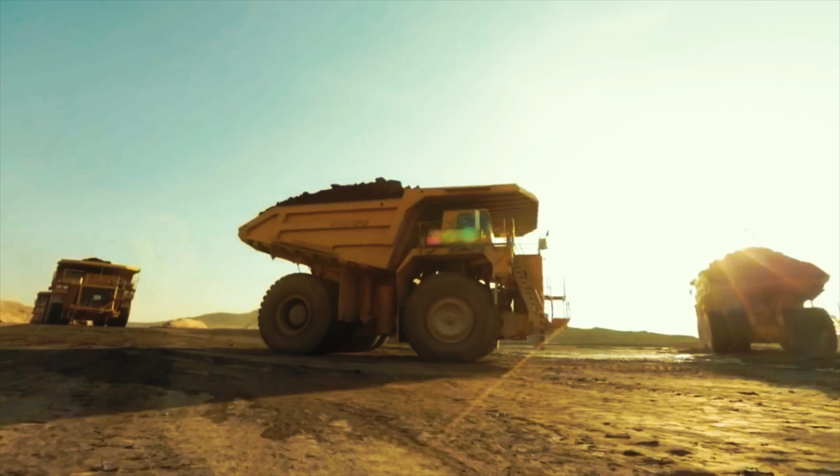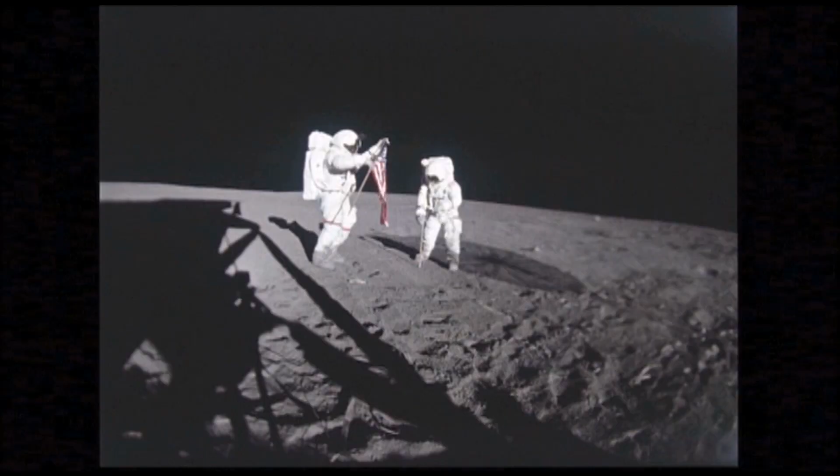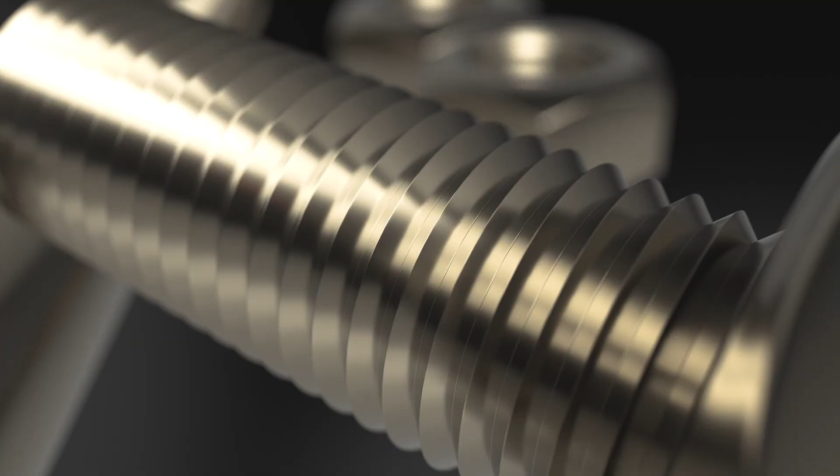From mining to renewable energy, from bridges to tunnels, high-rise buildings to foundations, toys to cars, from hanging a painting to landing on the moon. Bolts, nuts, washers, rods. The family of fasteners are the unsung heroes of the most basic personal contraptions to the most advanced inventions. Critical wherever they are, the finest fasteners once installed never revealed themselves.

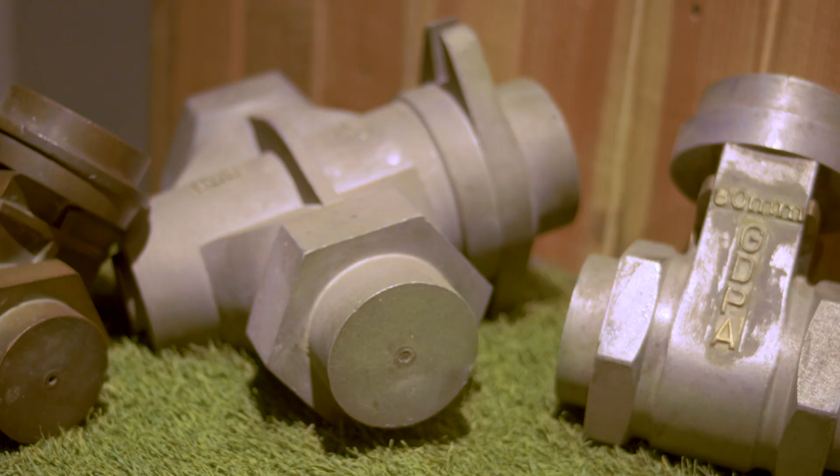More than strength, durability, performance, the finest fasteners provide what we at GDPA Fasteners have strived for centuries. Total and absolute peace of mind. Part of the GDPA group, GDPA Fasteners brings to the table its centuries-old legacy and, more importantly, over 100 years of manufacturing and business excellence. The fastener company was set up in 1985 in Jalandhar, India, and today sells across 35 countries to distributors and OEMs.

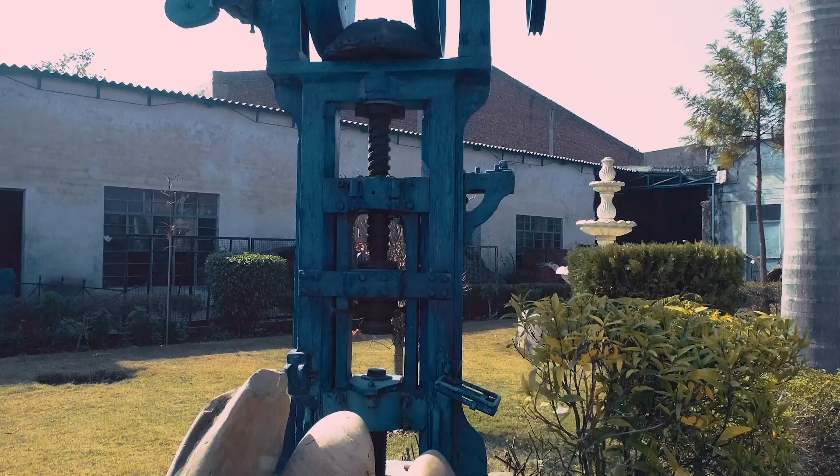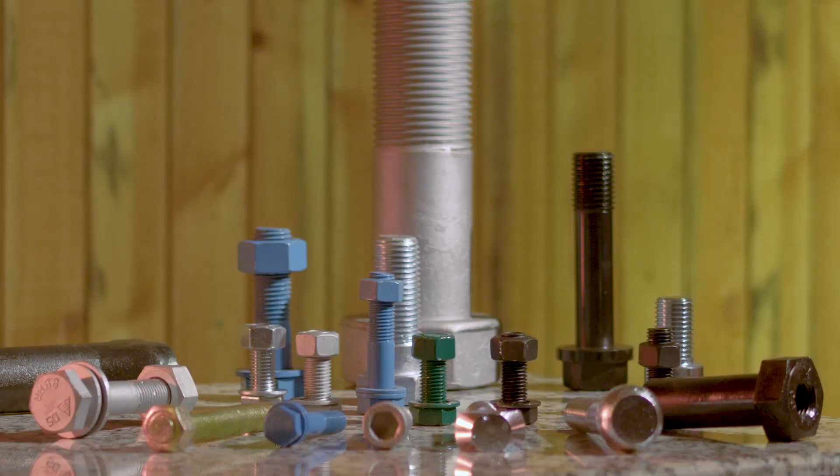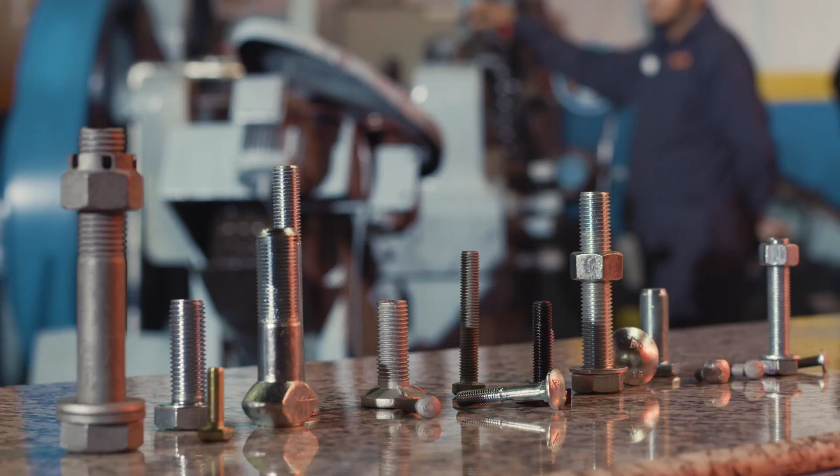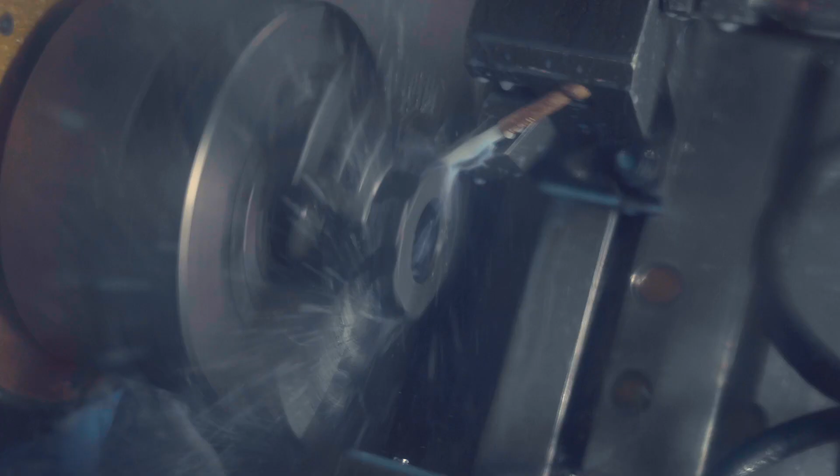The legacy of the House of GDPA lends reliability, experience and expertise, which become the stepping stones for the anchoring proposition of GDPA Fasteners, to offer peace of mind to customers through both quality of products and quality of business service. It starts with the end-to-end in-house manufacturing of the full range of fasteners. It allows GDPA to have full control over the quality of the products through stringent production protocols, allowing customers to have minimal quality dependencies and just one company to audit.

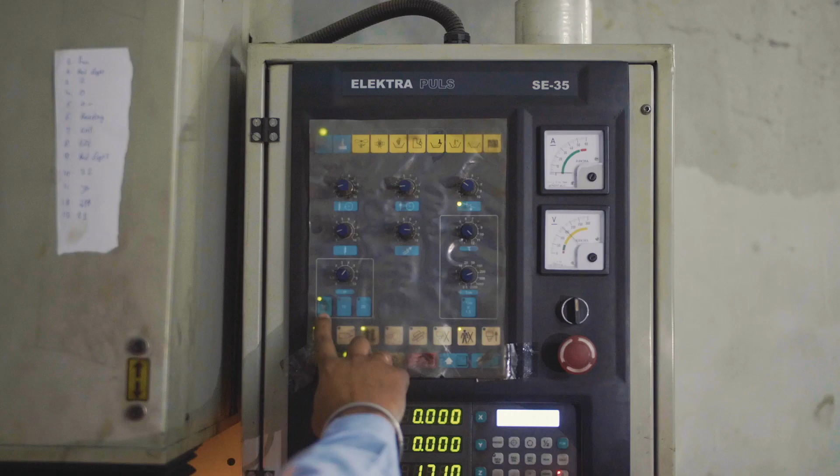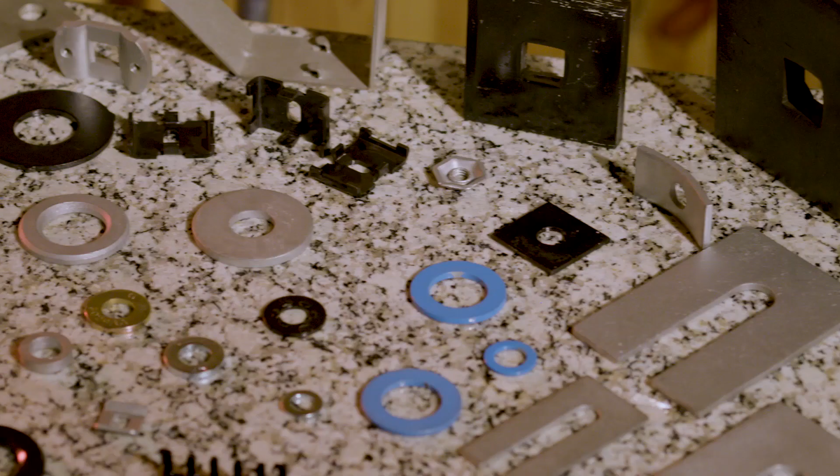It allows full control on the supply chain, leading to on-time deliveries. In-house design and engineering allows for fulfilling the requirement for engineered products and application fasteners. And finally, the full spectrum of fasteners allows GDPA to become a one-stop shop for distributors, resulting in ease of business for them. Nothing can talk better about a manufacturing company's excellence than its heroes, the products.

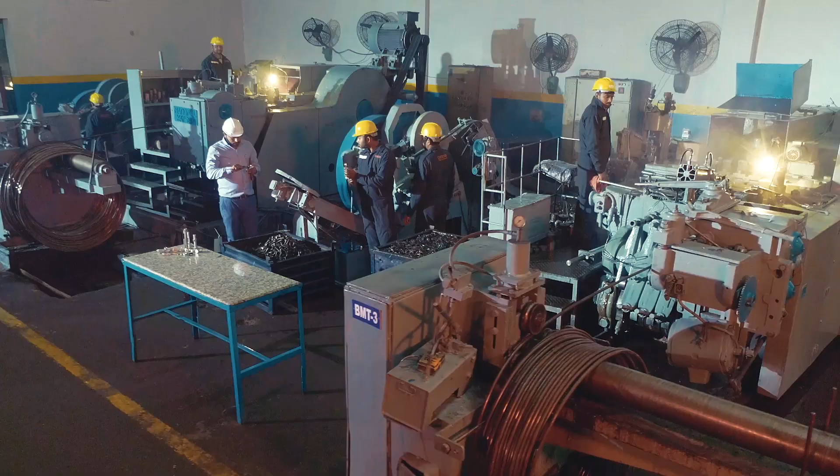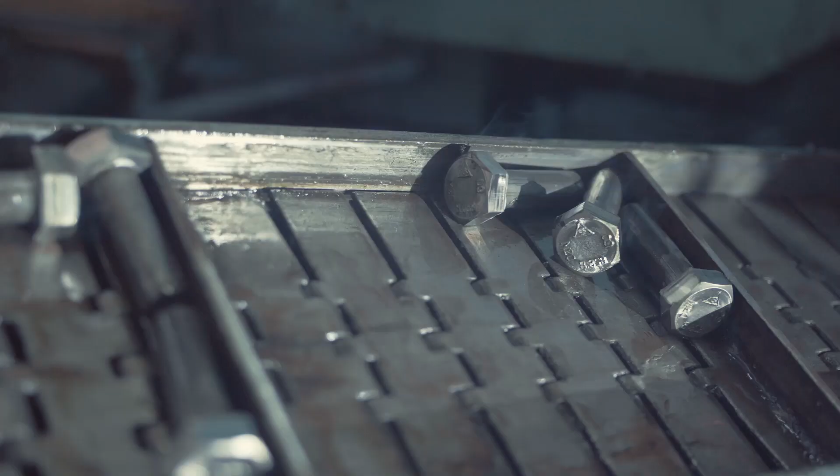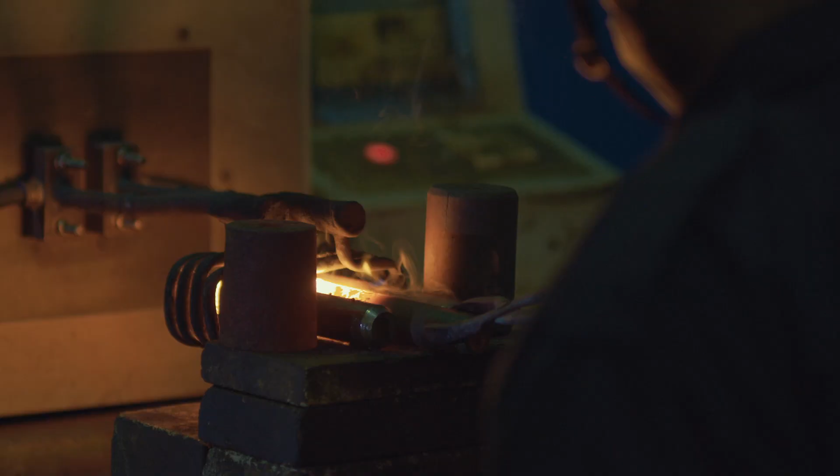And GDPA under one roof makes the full range of the finest fasteners across many applications. General industrial, mining and tunneling, wind and hydro turbines, high-rise and heavy construction, automotive and agricultural, tamper-proof and security fencing systems. Starting with bolts, which GDPA makes a wide range of by both cold and hot forging. The advanced cold forming allows for bolts as large as 24 mm in diameter and 450 mm in length. And the advanced hot forging allows for bolts up to 80 mm in diameter and 2 meters in length. Very few manufacturers can match GDPA when it comes to large-sized bolts.

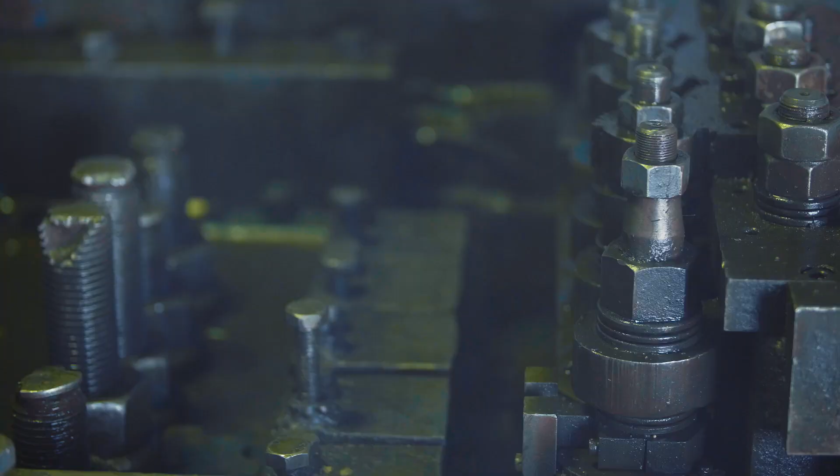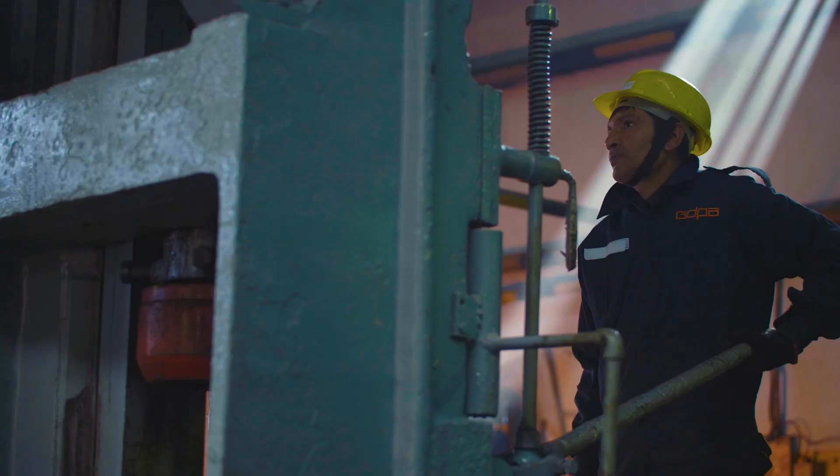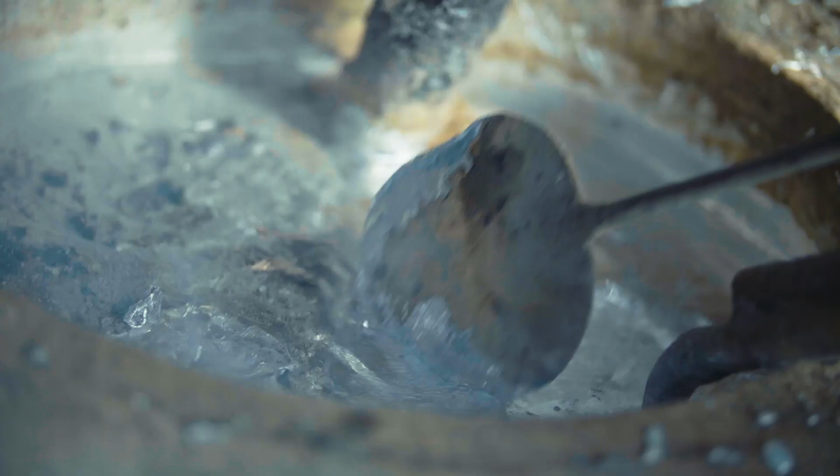And the same applies to nuts, which is GDPA's fastest growing division. GDPA makes nuts from M12 to M120 using precision hot and cold forging and machining. And CNC machining is done post-heat treatment, unlike most manufacturers, which leads to higher precision products. Next up is GDPA's full range of standard washers and punched, profiled and fabricated sheet metal parts. GDPA is able to achieve a hardness of up to a minimum 300 HV or higher, with technical capabilities to properly hot-dip galvanize both washers and sheet metal, leading to better corrosion resistance.

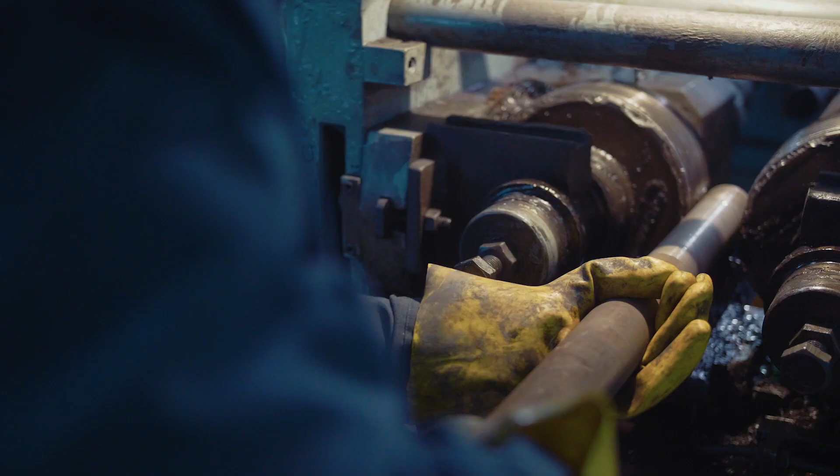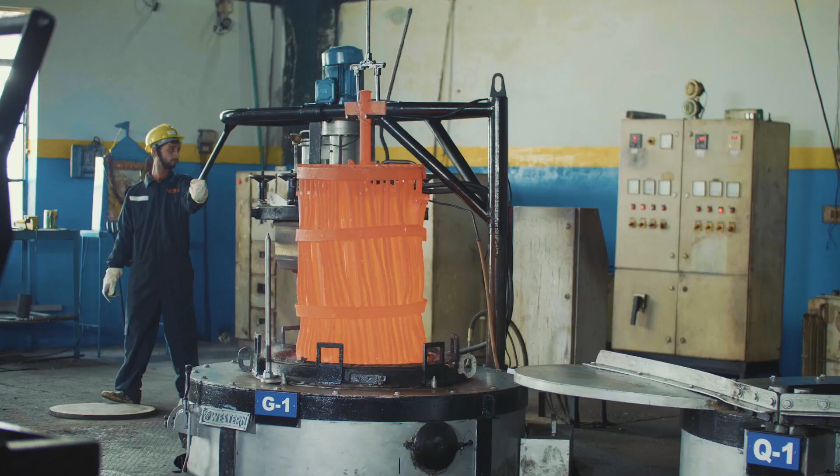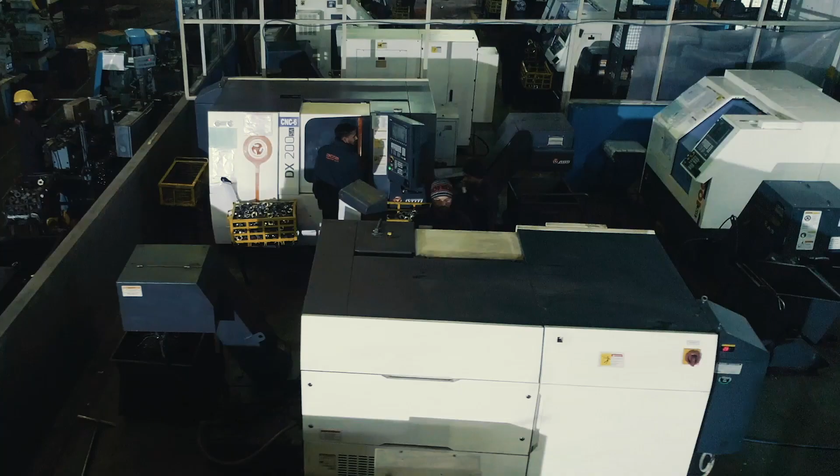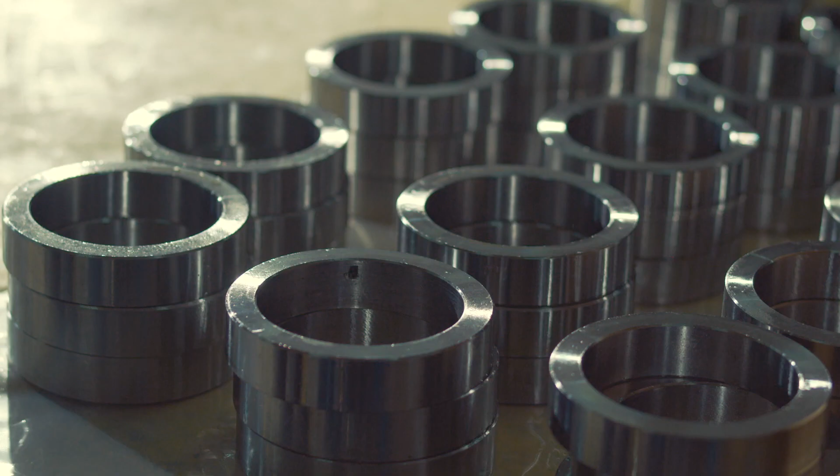GDPA's threaded rods and engineered studs go up to a diameter of M80 and a length of 6 meters. There is also a specialized heat treatment facility to handle 2-meter long parts and hot dip up to 3-meter long parts. For U-bolts, L-bolts, eye bolts and anchor bolts, GDPA has bending capability from M8 to M48 diameters. And apart from this already wide range, GDPA has expert CNC capability to make custom and modified parts. Such a wide variety of products allows customers to buy an eclectic mix of products from a single source to serve a variety of end users.

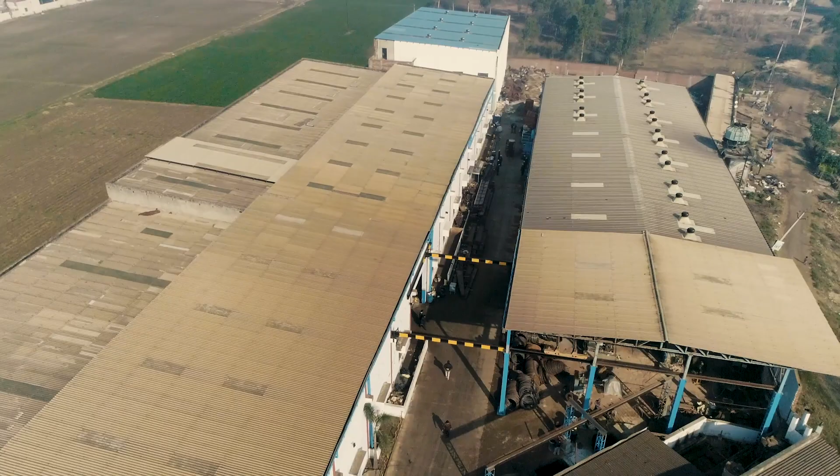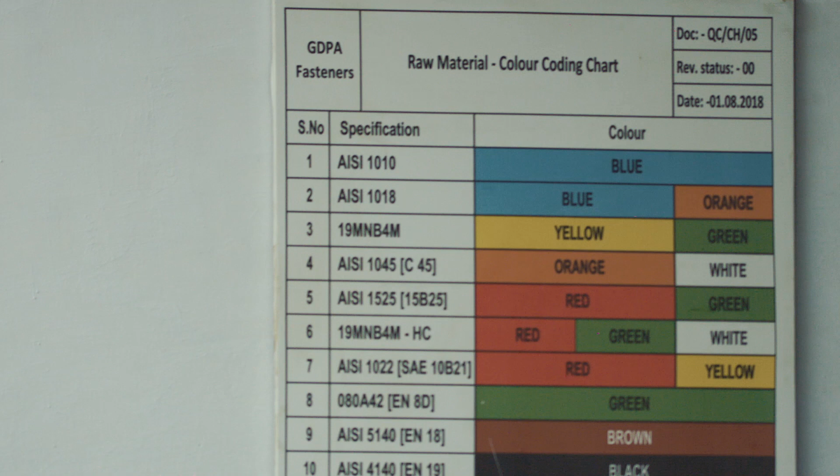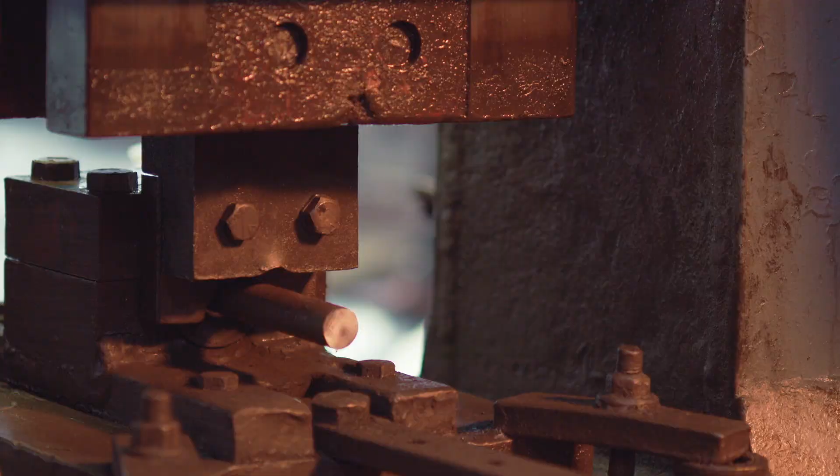Supporting the production of such a wide variety of fasteners is the end-to-end manufacturing facility. The 3 units of GDPA span over 15 acres and house the complete range of quality machinery. The anchoring thought of peace of mind starts right at the beginning with the purchase of raw material, where GDPA has an extremely stringent vendor approval process. Once quality raw material is procured and a unique MRN issued, the people and machines take over. GDPA houses its own drawing and cutting capabilities. It also has a phosphating facility, including capabilities for using steel in SAP condition.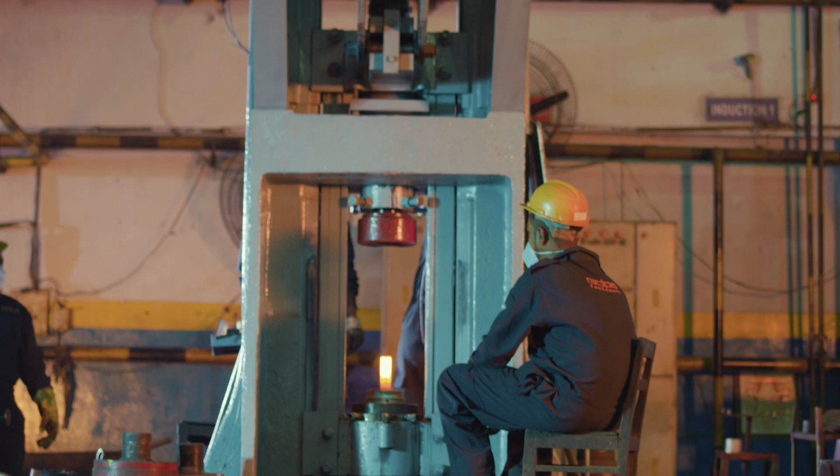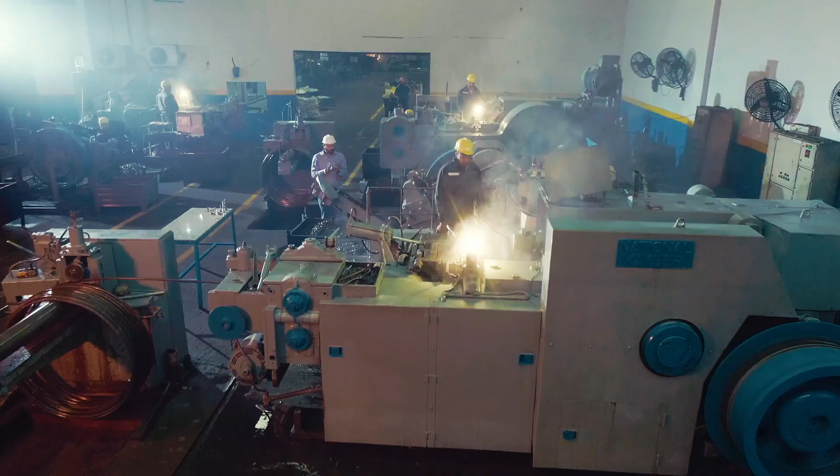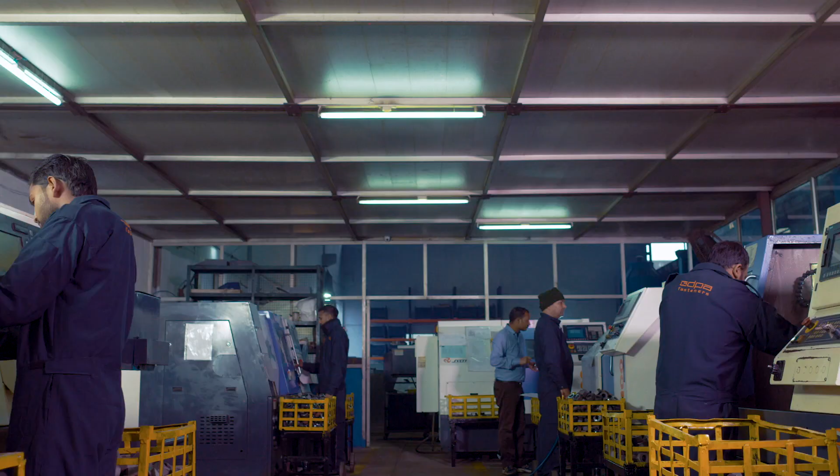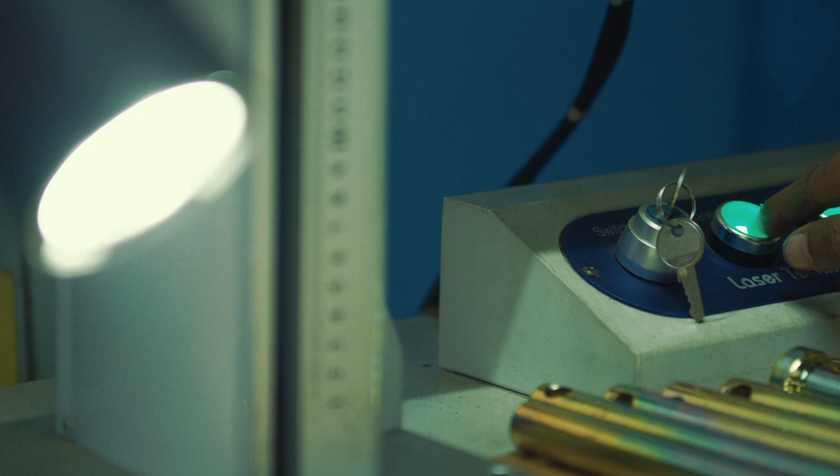There are 8 forging stations for nuts and bolts, followed by over 20 roll threading machines. The cold forging department for nuts and bolts houses 14 cold forging stations, including 4 national 4-station bolt formers and 3 5-station nut formers. For sheet metal parts, GDPA houses over 20 presses with automated cutting, bending, punching and profiling capabilities. Machining these products is a fleet of over 25 numeric controlled machines and over 15 CNC machines. The facility also houses special heads, tooling and die making capabilities to be able to rapid prototype and custom re-engineer products. GDPA also provides batch lot traceability for critical application fasteners through state-of-the-art laser marking machines. To support this, the facility also has CAD/CAM, wire cut and EDM stations.

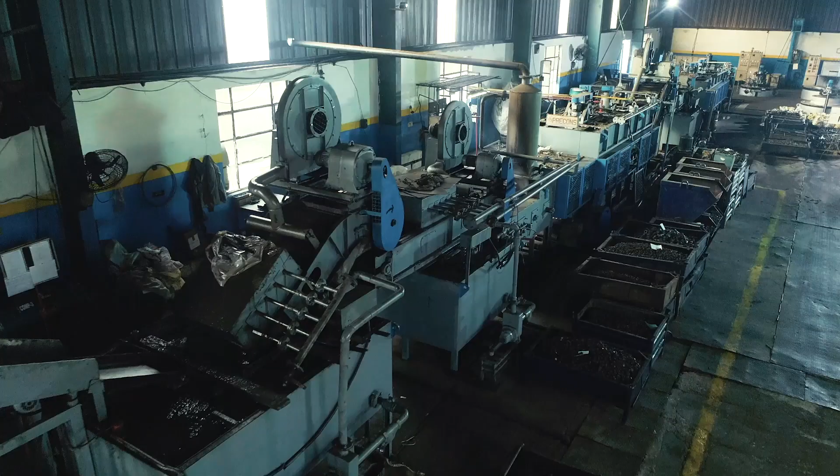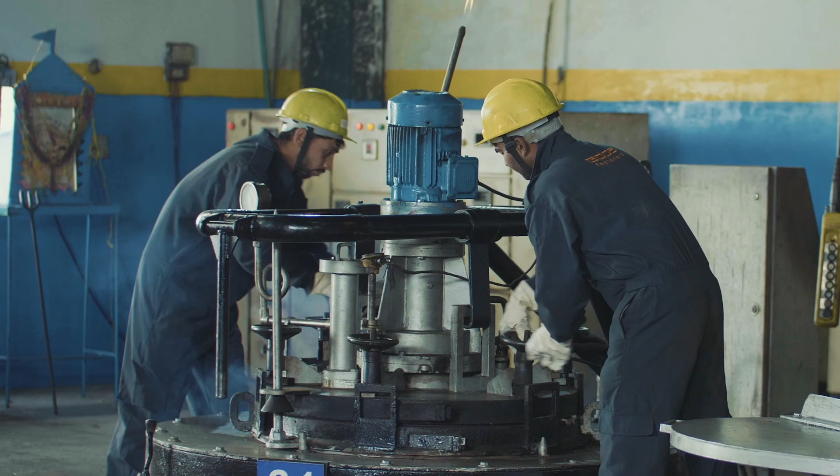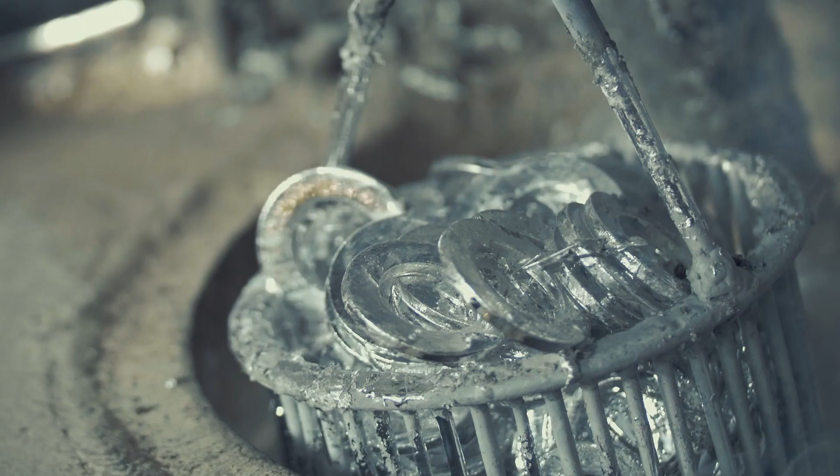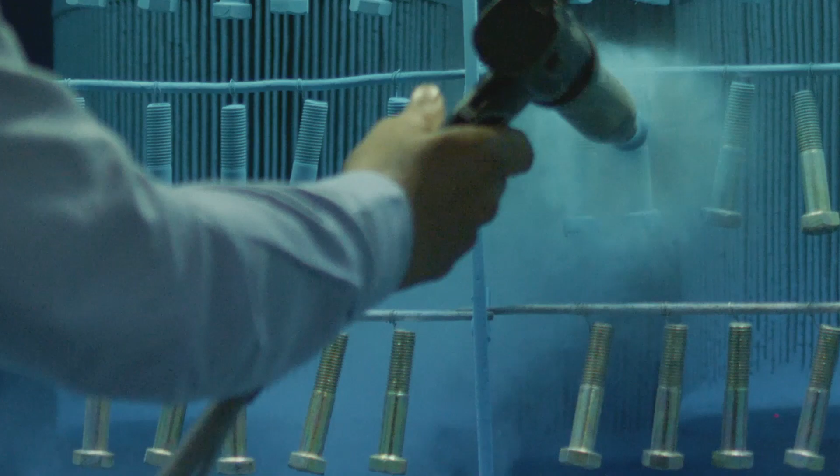GDPA has an in-house facility to heat treat all its manufactured parts, including SCADA-controlled continuous heat treatment lines capable of handling parts up to 36 mm dia, 3 rotary furnaces and 4 gas carburizing furnaces capable of handling parts up to 80 mm in dia and 2 meters in length. For surface treatment, the facility has capabilities and infrastructure for black phosphating, electro-zinc plating, both in hexavalent and RoHS compliant trivalent coating, hot dip galvanizing and mechanical plating capable of handling parts as small as M8 and as long as 4 meters. GDPA's powder coating division offers WRAS certified Rilsan powder coated fasteners for potable water applications. The facility also offers its critical applications customers zinc flake coating like Delta, Dacromet, Geomet, including top coats.

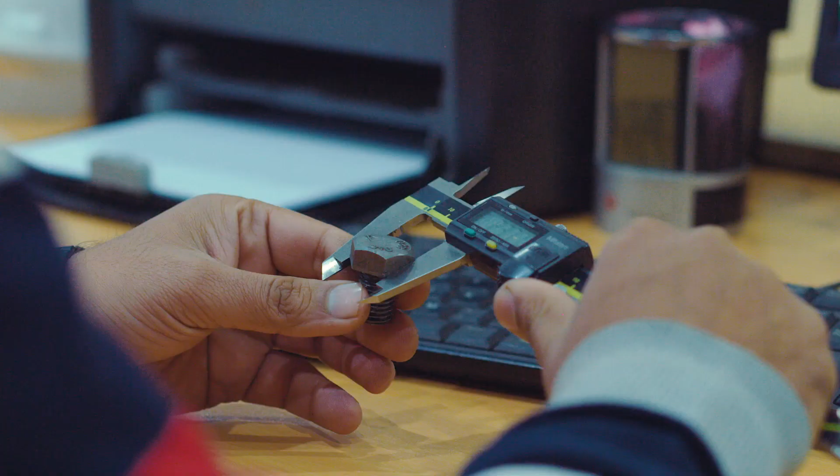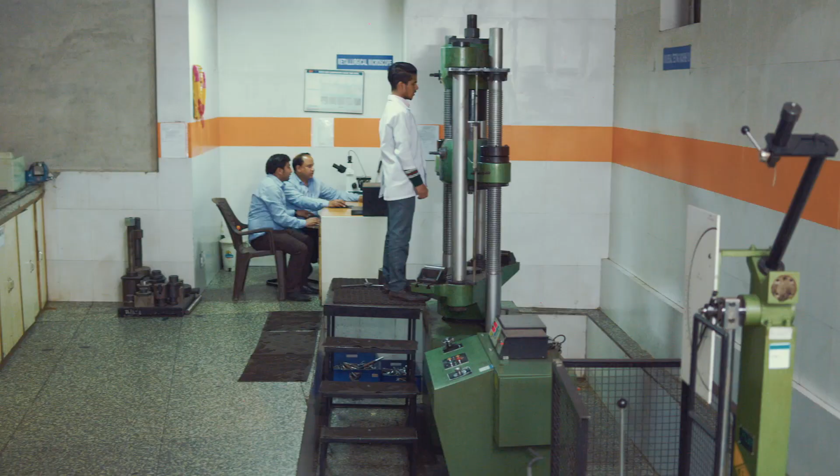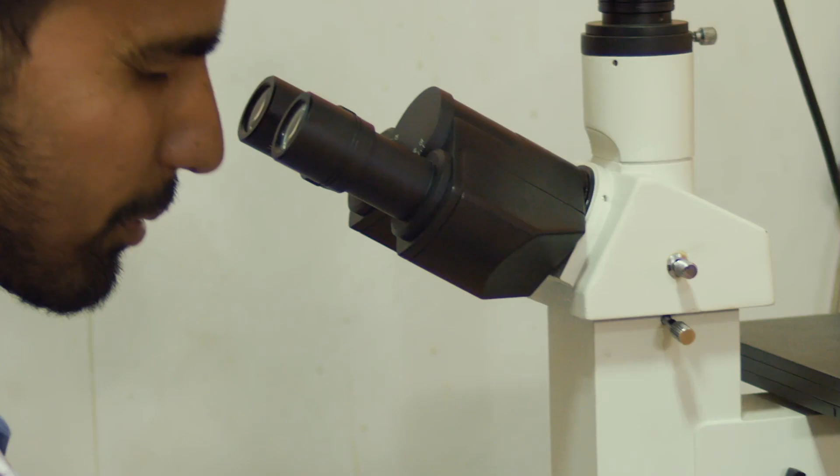GDPA's QA and QC teams are fully equipped to do complete PPAP documentation and carry out SPC and MSA studies for its automotive and OE clients. GDPA is also certified to EN 15048, EN 14592 for non-preloaded fasteners and EN 14399 for preloaded fasteners, including of course ISO 9001-2015. The incoming quality control consists of ultrasound and spectrometer tests for steel. And the final quality assurance is done through digital hardness testers, microscopes, UTMs for tensile elongation and suitability tests, impact testers that can carry out impact testing up to -40 degrees Celsius and MPI.

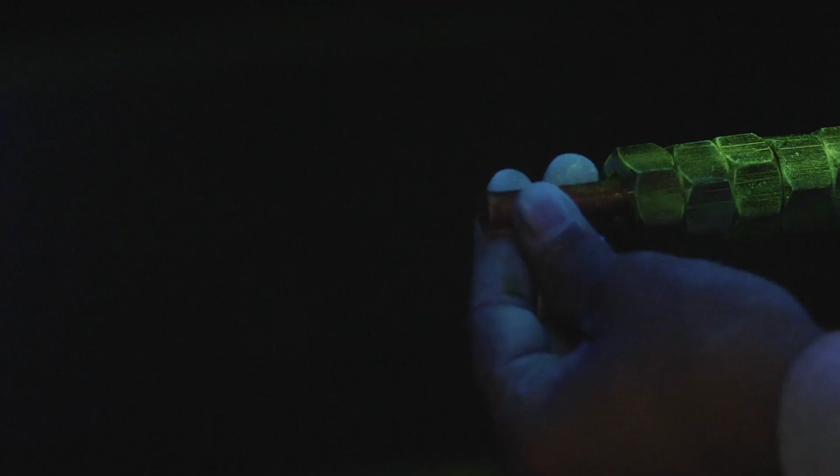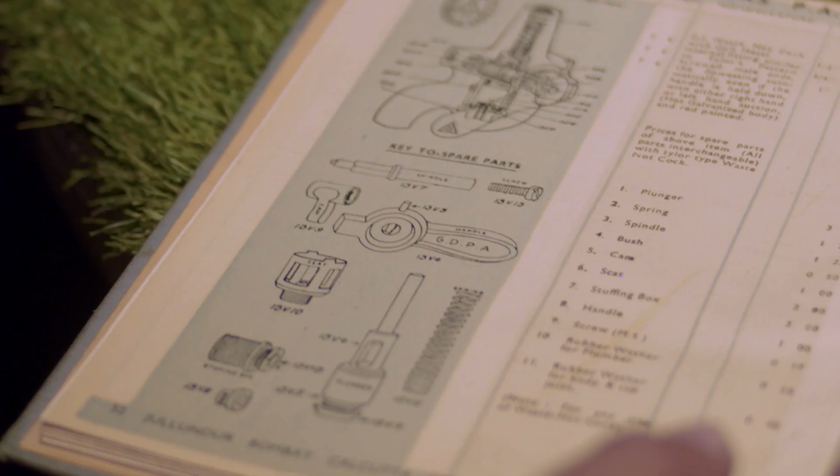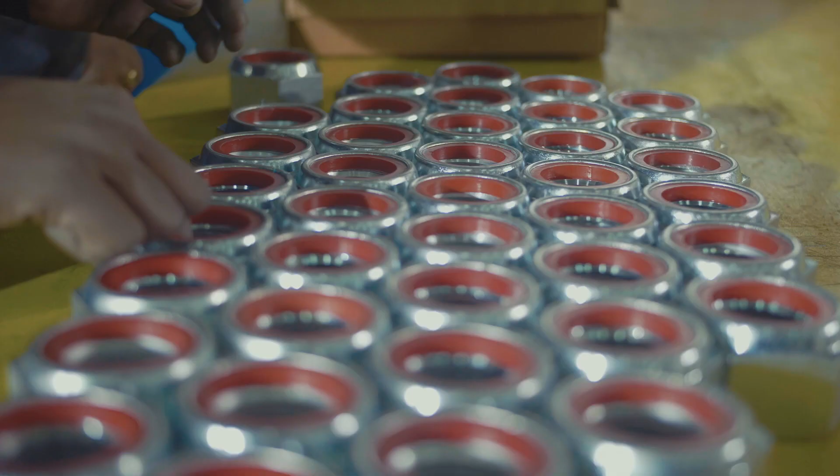Fueling this proposition is a team of over 500 GDPA employees, headed still by a family with over 100 years of manufacturing and business acumen. GDPA has been adopting a modern decentralized organizational structure. The both experienced and young sales force makes business super comfortable for customers. This is also aided by GDPA's offer of a joint stock program for its long-term customers, where it maintains safety stock in-house to replenish customers in stock-out and spot order situations.

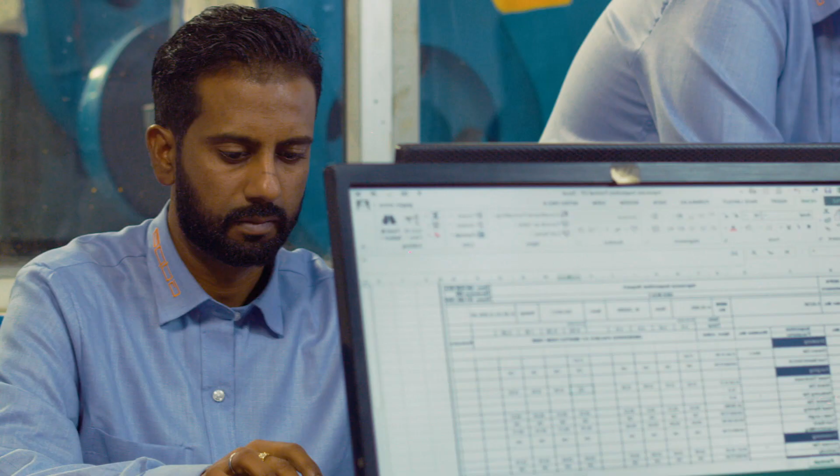100+ years legacy, in-house end-to-end production, a super wide range of fasteners, market experience of over 35 years, complete compliance with norms and standards, relentless quality control and experience, and capabilities to design and manufacture custom and modified products. And finally, the ease of doing business. All of this makes GDPA Fasteners offer you something priceless, total and absolute peace of mind.